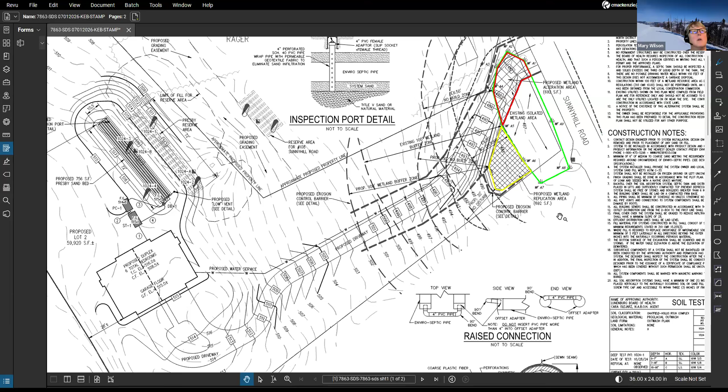We didn't do an intense topography of the area, but we shot the rim of the catch basin, then we took a shot just beyond, going towards the property here. The shot we took off the catch basin is actually lower than the catch basin rim. So water's coming to try to go to the catch basin, it's not making it there, and it's more or less getting backed up into this area.

We could certainly increase that by coming up the hill a little bit further. It's a little tough to get the driveway squeezed in here and still have some reasonable room. Obviously the higher up the hill we go, the harder it's going to be to make a replication area that's actually going to stick. This is more or less at the same elevation as the area we're filling, a little higher up in the back corner over here.

The area in question, from the sidewalk, looked like it was an area of mature tree growth as well. Yeah, it's been untouched for a long time, probably since they did the last work on the road when they put the catch basin in.

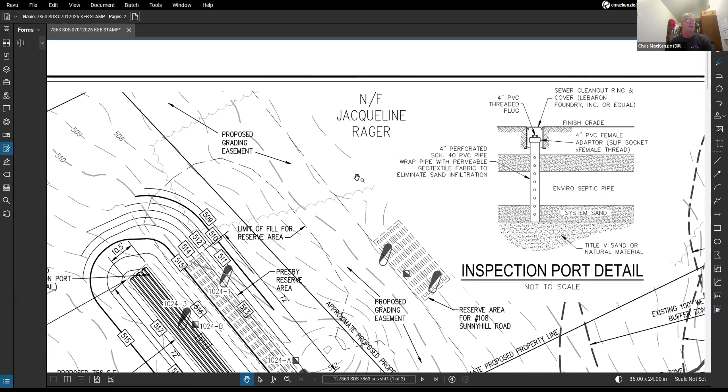The entire site is pretty much wooded, with the exception of a little bit of area back here—this is the existing tree line. So there's a bit of a field on that existing lot down below, but other than that it's completely wooded.

Okay, and do the plans moving kind of up gradient on this drawing actually have anything that accommodates for that raised elevation for the septic field and that sharp drop off from the septic field? And how do you ensure water doesn't just sheet off and into the next property?

Right, the Title V requires a minimum grading in this location, and we meet that grading. It's a 3-to-1 slope, which is considered stable by them with some loam and seed on it. Okay, and that answers the Title V obligations.

How do you ensure that the water from here doesn't just pour into the next property? Well again, it meets Title V requirements for the grading for a system, so that standard is designed to not allow water to flow onto the neighboring property.

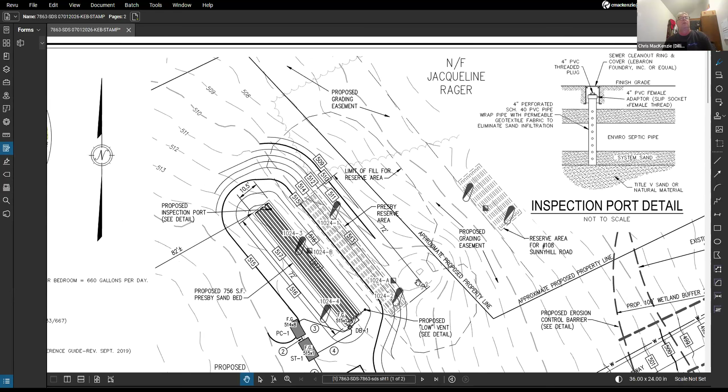The septic system area is not impervious, it'll have loam and seed. It'll be brought back to the same kind of condition with a vegetated surface that will absorb rainwater just like any other lawn area.

Okay, it just looks like there's some steep elevations back in there. They're a 3-to-1 slope, that's standard Title V system design, we design it that way for every system. Well, what I'm trying to say is that on top of the natural topography of the land, it looks like it's a little bit steeper up in that area.

It will be, yes, because it's a fill system. The groundwater table is a little high here, so we had to build up the leach area to meet the Title V requirements for groundwater separation, and that results in the system being higher. So at a 3-to-1 slope, it takes us a little while to get back down to existing grade.

You can see a proposed grading easement over here, and there's an easement line that's going to run right along here. That's there for the reserve area fill, which comes down the hill even further in order to meet the fill requirements for the reserve area, which is not being built at this time.

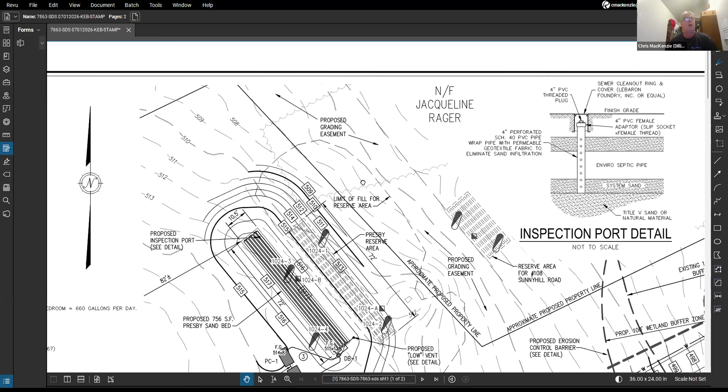It's there in case it does ever have to later on. But we also had to provide a proposed grading easement that goes beyond the limit of the reserve area fill, because this is a Presby system, which has a smaller footprint than a conventional system. When we design a Presby system, we're required to show that a conventional system could be built on the property. Therefore, we need the easement.

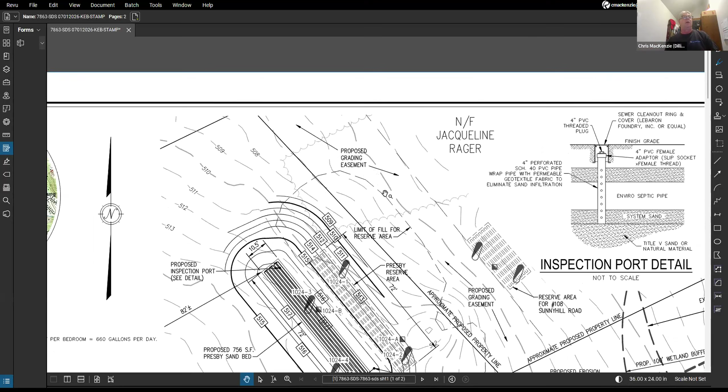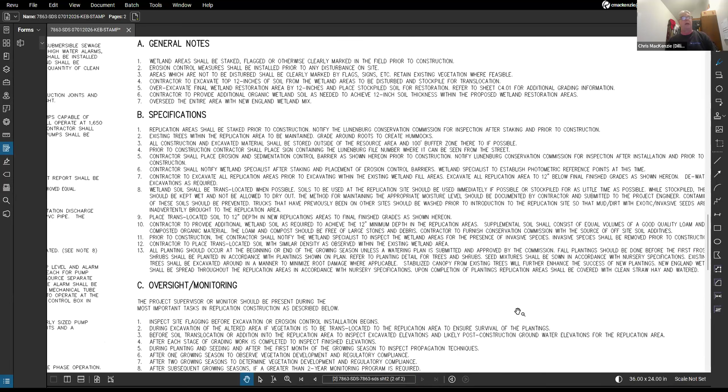I have a page 2 if you'd like to see it. It shows the size and scope of a conventional system that would, if installed here, be much larger and much more intrusive on the entire site. I can just hop right over to that sheet right here. Oh, of course, it's all turned off. Sorry, my mistake. My apologies.

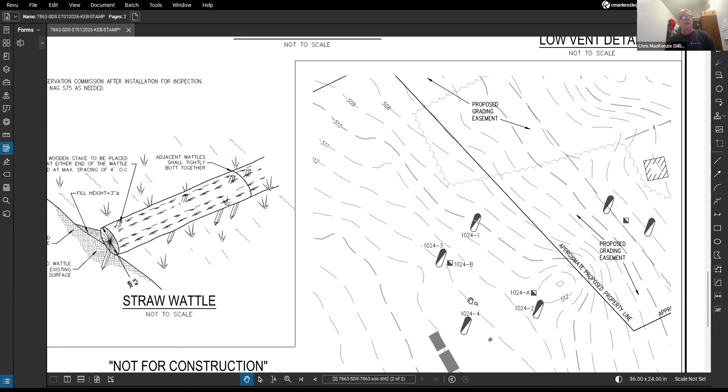It would show here if there was a conventional layout. It was set to be here. It must have been turned off when we did this particular print of the plan, but I assure you it's quite a bit larger than the Presby system and far more intrusive. So we've done everything we can in a sense. But still, if a conventional system had to be put in there, presumably it could still be accommodated within the parcel. Yes, okay, we're required to do that.

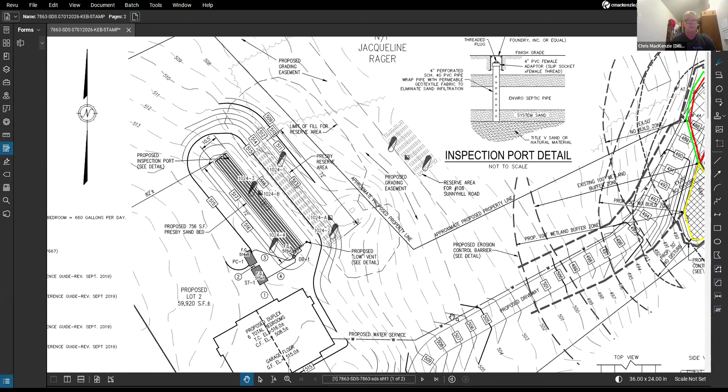I know I have another copy of that plan that has that on it. Yeah, I think we would need to see that just for full accountability on what could go on here. Sure.

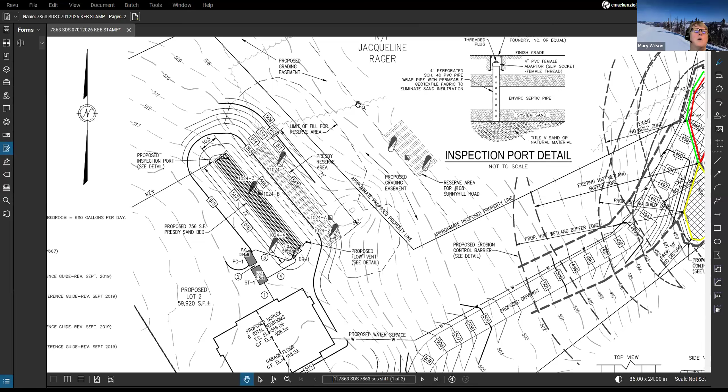All right, and then getting back to your driveway, how are you ensuring that driveway runoff doesn't get into the existing wetland system or the replication area?

Well, obviously, erosion control barriers will be put in place during construction. And then all of the side slopes will be stabilized before the erosion control barriers are removed.

Yeah, I think I would be looking for some type of, I don't know, French drain or something that would keep runoff from going into those areas. Well, that's my thought too, right? But this area is basically created from runoff coming down and not making it to the catch basin that's located there. So really, this is the only area for the water to go. We can't really make it go some other place.

How about a swale or something like that? A swale to where? Encourage it to go to the opposite side of the driveway. Okay, and that's just going to end up down in the road. So if I put it over onto here and swale everything over into this area and it comes down, where's it going to go here?

So I suppose we could swale this all the way down to here and do a culvert underneath. Put a swale there and put a rain garden or something upland there to minimize the full length of the driveway discharging onto the road or into the wetland. Up in this little corner right here.

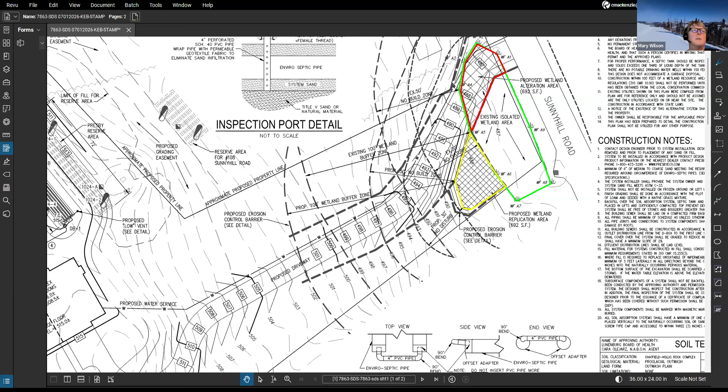Yes, Teddy Doucette. Thank you, Madam Chair. I agree with your sentiment here. I think a rain garden to help minimize the runoff and some native plantings would be great, especially since we're proposing to move and replicate the wetland area. I would like to see additional water catchment there. I like your idea, Mary.

Okay, thank you, Teddy. Rich Birch. Thank you, Madam Chair. Chris, I had a couple quick questions. Number one, the limit of work for the driveway prior to the rain garden idea is the erosion control barriers. That's the limit of work. That's correct, Richard. All right, so no trees outside of that barrier currently are scheduled to come out. Right, correct. Okay.

Second thing, I'm not a fan of a 1-to-1 replication area, and that may help with some of the stormwater problems, or Mary's idea of putting a small rain garden in on the other side to try to help mitigate. I mean, we're going to increase the velocity of the water coming down this hill, but we're leaving that isolated wetland that is the natural catch basin now at the same size, so it will, I think, get inundated. What is the elevation of the catch basin?

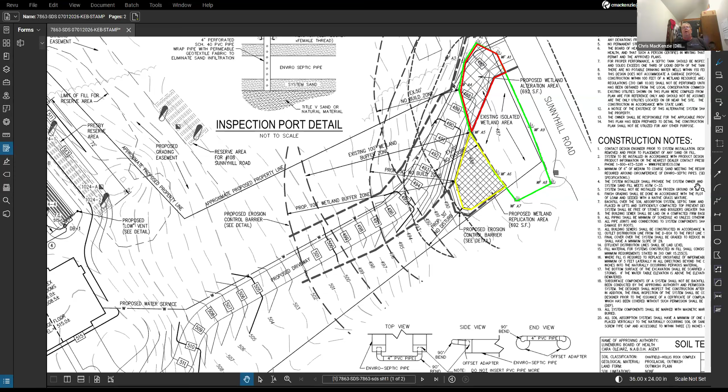And there's a shot approximately right about where the cursor is, and that is elevation 485.4. So it's a 10th lower, but it is lower. And we all know water doesn't go uphill.

Now, we didn't do an intense survey of this area, so I don't know what else is going on there, but that one shot indicates to me that this spot is lower than the catch basin. So if water gets here, it's going to stay here. It's not going to get to the catch basin. I don't know what that means going up this way, or if there's basically just some kind of berm or something in here that's just enough to prevent water from getting through and holding it back.

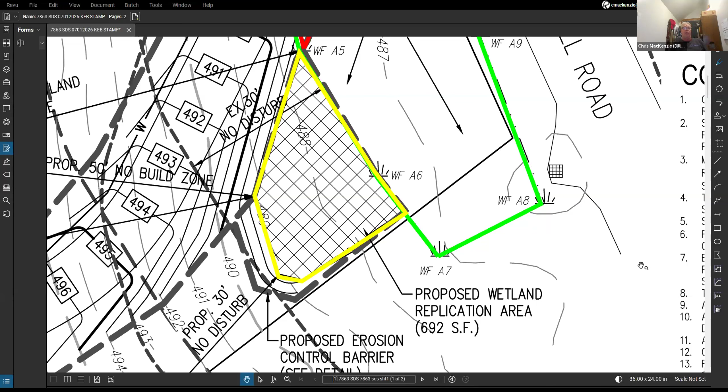It's hard to really tell without an intense investigation into that.

And I assume the replication area is going to be 487? 487 for an elevation, yeah. It's gonna, this 488 contour that I show right here, proposed contour, comes and wraps around the outside of that. I don't designate a specific elevation in here.

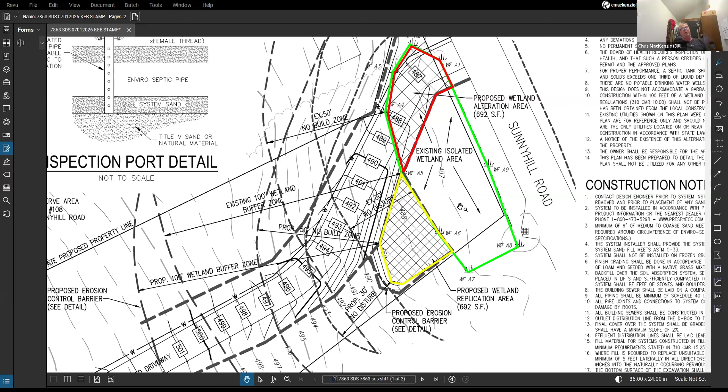I don't know that we could cut this all the way down to 487 without intruding into this wetland to make it connect. We need to keep the elevation equivalent at the connection where these meet.

If we go lower, we're going to more or less create a berm in between there. So if I bring this down to 487 over here, there's going to be a berm here, and then it's going to drop back down again. So that'll cause a problem.

So this area needs to stay above 488 then. It just didn't have any final grade in there, so I was just investigating what we're going to be at the end of construction.

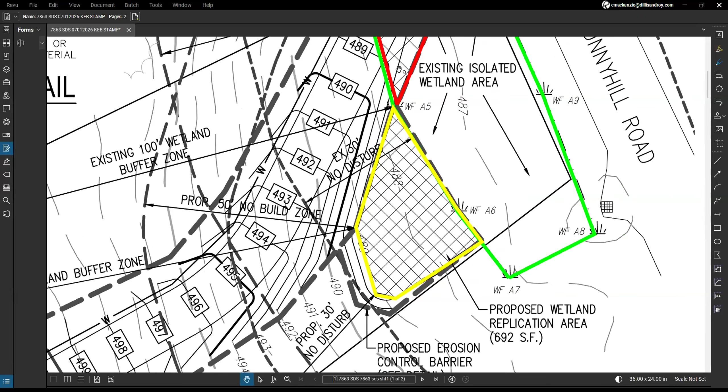Sure. And do you have a construction schedule showing that the driveway will be put in, all of the grading will be stabilized inside the 100-foot buffer, and the replication area will be constructed at the same time?

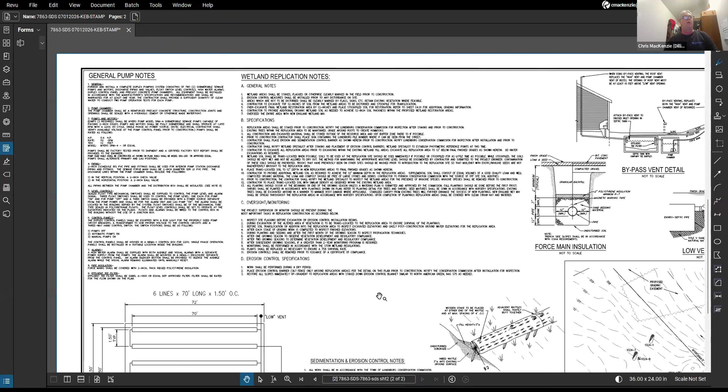We have some notes in here. I don't recall specifically what the orders are on it, but we do have some in here. Can you make that larger, please? Certainly. Yeah, thank you.

So it does talk, this is mostly for the replication area and how that is being constructed. Okay, yeah, I read through it, but I didn't see a schedule as far as I would like to see all of the stabilization and the replication area all done during the construction phase of the driveway.

So in the beginning, so that we get all of that stabilized. So if something happens and this project sits over a season or two, we don't all of a sudden have open ground running and erosion problems into the isolated wetland that is existing, plus the replication area that we're trying to establish.

Right. Well, it's typically the practice that you need to do the replication and the filling at the same time. That's standard practice. So are you saying you want to make sure the driveway is constructed at that same time?

Unless you want to do it before the driveway. Well, right, I'm just trying to understand what you're asking. I don't know if I quite understand.

I would like to, I mean, we're not talking months of construction there. I personally would like to see the driveway put in at the same time as the replication area so that we're grading in the same area and then everything is stabilized and the replication area is established, all at one fell swoop.

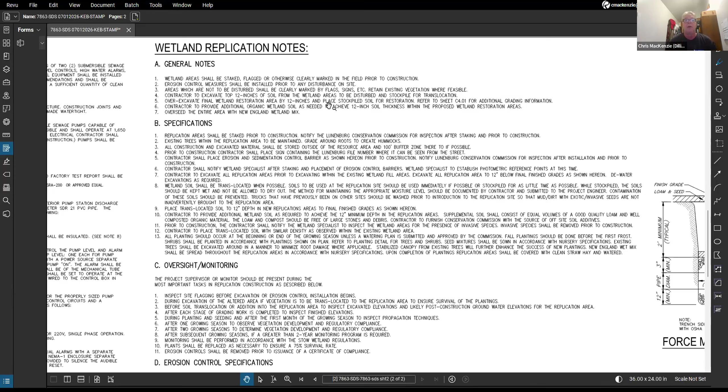I don't think they want to go through the existing house lot to do that, because that would just be some additional construction that would be needed to get back there. So the driveway will have to be built before they can build the house.

So I think what I heard, Rich, is that Chris agrees putting in a construction schedule to detail out the replication area first, and stabilization done by the time the driveway is done, is acceptable. Is that what I think I heard, Chris? Yes, all during the construction phase of the driveway. And that would be prior to, obviously, any construction for the building starting.

Other questions or comments from members of the commission? One thing I did want to point out with any replication area is that we expect that to be monitored over the course of two years by a certified wetland replication scientist. I think it's a wetland scientist. We have some canned language that I'm certain Herlin can find for us if need be. Just to put that out there as an expectation in case anybody has any concerns or wanted to ask questions about that.

Are there any questions or comments from members of the public? If so, raise your hand and state your name and address, and I'll call upon you.

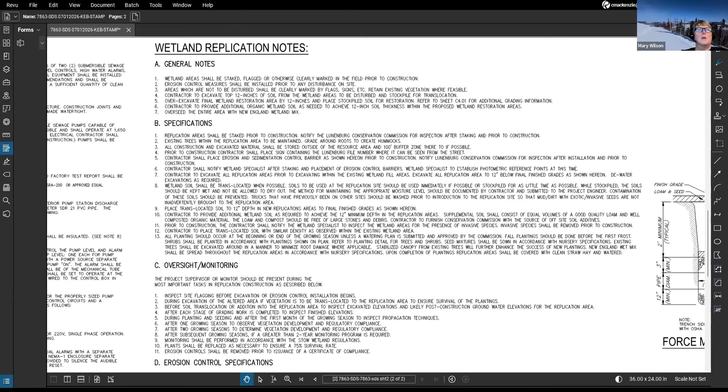Sure, let me try. Thank you. Colleen, I see your hand raised. If you could state your name and your address.

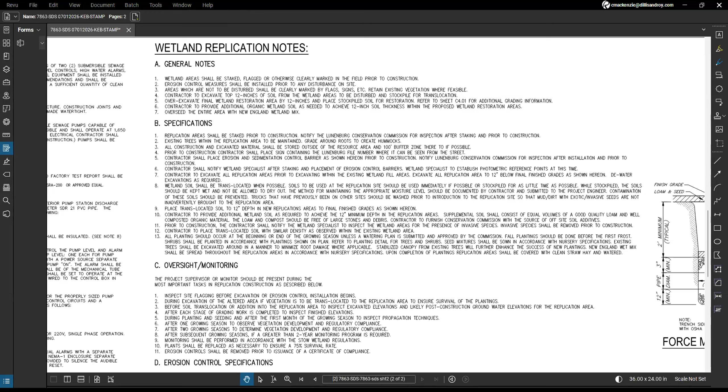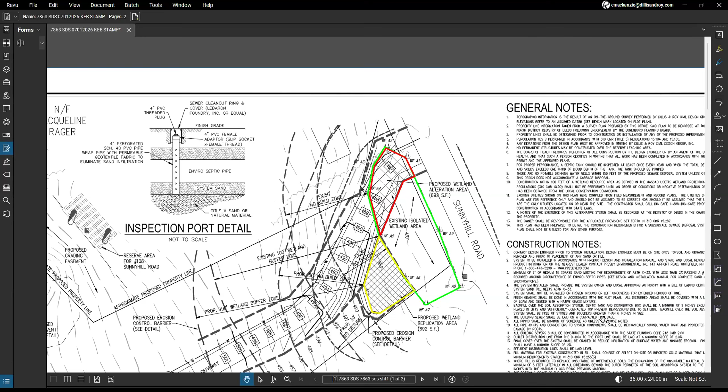Hi, my name is Colleen Kostich. I am at 119 Sunnyhill Road in Lunenburg. I believe the driveway is being proposed right across the street from my house. The biggest concern I have is flooding. We have huge flooding problems in this area. This past Monday, I had rivers going down both sides of my house, pouring into my basement. I had a lake in front of my house. I am probably the lowest point of Sunnyhill Road, and I was out moving sandbags around my property in the pouring rain because it's so bad. So I don't really have a problem with anything that anybody wants to do with their property. I just have a problem if it's going to negatively affect the huge problem that we already have on Sunnyhill Road.

Thank you, Colleen. Colleen, were you the abutter that shared photos, or was that one of your neighbors?

Oh, Colleen, you went on mute. Sorry about that. I am not the one that submitted those pictures, but I did share some of those pictures with my neighbor. So some of the pictures that they had forwarded to the Conservation Commission were my pictures. Okay, thank you.

Let me just download those photos and then I think I can share them. Herlin, I think you said that you weren't able to share them. I am not. It says because I am a host, it won't let me share, and I think it's the settings on this communal Zoom account. Yeah, let's see if I download them. It's weird because I'm a co-host, presumably I should have the same issues as you, but at least for right now it's saying that I can share them. Oh, it only downloaded one image. Let me go to the next image.

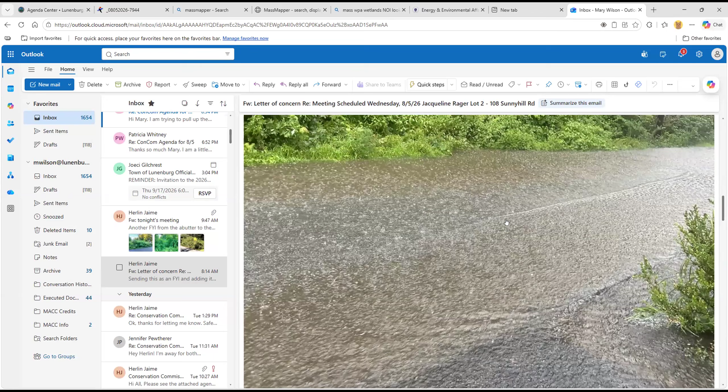And when was this taken? Was this from this week's storm? Yes, this was this week's storm, on Monday. Okay.

And that is to the left of my driveway at 119, in between my driveway and I believe the Todd and Tabitha Jennison house, 129. There is a basin right there on the other side of the basketball hoop, and there's just water overflowing that and a river going down into the back where a stream normally is behind our houses there. So that entire area, from my house over to Todd and Tabitha's driveway, is a river.

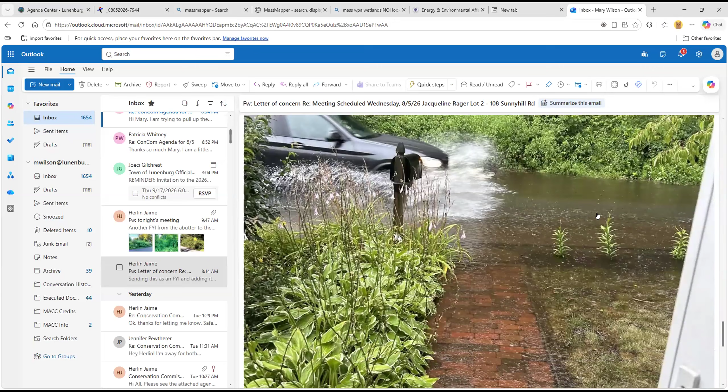And then this is looking straight out off your property. I just happened to open the door to take a picture of the lake in the front of my yard, and a car was coming through at the same time, so I caught that picture. That was after it stopped raining — it just holds water.

Thank you for giving us some context on those photos.

Rich, one of the things I was wondering — I've seen, though we don't ask very often, sometimes for driveways coming down steep slopes, a kind of drainage area at the end of the driveway so it's not just sheeting onto the road. Would that be something to consider here, do you think?

Well, I'm not sure where they would put it. Because in the picture with the brick pavers directly across the street, just off the apron, I can see the other catch basin that I believe is the one on the plan at the end of the wetland area. So, unfortunately, not knowing any more information about the rain flow, the water, how often it backs up, and where the water goes, I don't see how we can dictate any more than what we have.

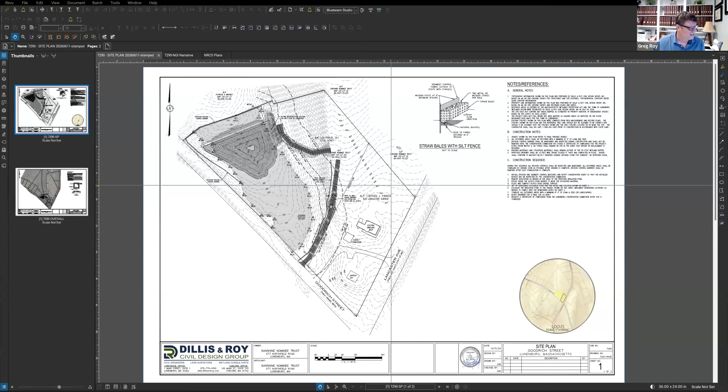Screen are you seeing? Are you seeing the plan? Yes. Okay, my computer just did strange things on me, so bear with me here.

Again, this is Greg Roy with Dillis & Roy. I'm representing the applicant this evening. I do not believe Mr. Violet is here, but I think John Mara is a representative of the applicant, so he's on the call as well. I wanted to be brief this evening, but give enough due diligence to solicit the commission's comments and any comments from the abutters.

We do not have a DEP number on this project, just to tell you where we're headed. I checked my email while waiting for the last hearing, and we did not get a DEP number on this one that I know of. So we will not be able to close this evening, but I wanted to introduce things with the hopes that we can get any comments in front of us so we can be ready to put the commission in a position in the next couple weeks.

So the commission may recall this project. It's essentially running the corner of Goodrich Street, which you can see here on the lower side of the plan, in Lancaster Ave.

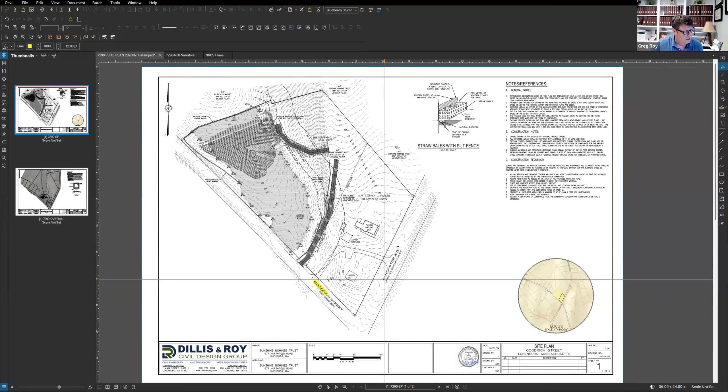There's an old farmhouse that's been recently renovated and sold right on the corner, and we came before the commission. There's actually a current order of conditions granted by your commission about a year ago, plus or minus a few months, for construction of this access driveway that comes up right in this location. That driveway has actually now been constructed. We haven't quite gotten to the point to request a certificate of compliance from your commission, but that work has been completed and installed. It was done earlier this summer by the applicant.

We've been working with Steve. Steve, of course, is a farmer. The property is directly adjacent to one of his fields, which is on the uphill side of this property. In fact, the driveway that was permitted was done so to provide access to those farming activities. And Steve is interested in constructing an irrigation pond to support the agricultural use of those fields, which has been done on a couple of properties he owns in the past, historically.

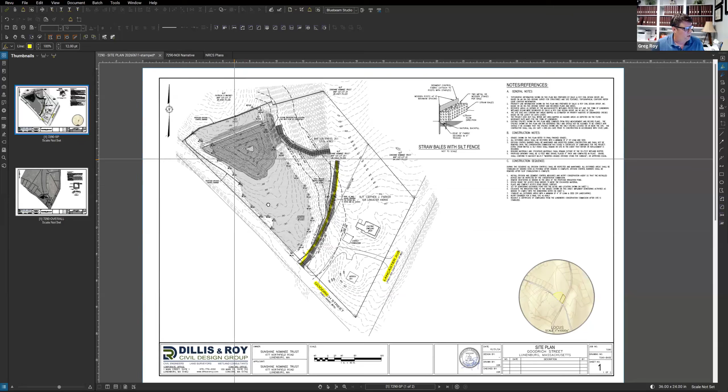So, turning to the plan, if you were to take Goodrich Street and come down past that existing house on the corner and past the new driveway, you'd get down to an area where we're proposing to work. Let me see if I can zoom this in as much as possible. The hatched area you see, sort of the gray shading here on the plan, is the limits of the bordering vegetated wetland as they've been delineated by our office.

So we have a line here that runs roughly parallel to the roadway. This wetland line was previously delineated when we did the road project a year or so ago. The dark circular-ish lines you see here down in this portion of the site would be the limits of the proposed pond on the property.

Earlier iterations of this had the pond actually slightly larger, coming closer to the property line here, which is the abutting property of Mrs. Whitney, who is also on the call. We pulled that back to give some buffer, but also because we had to honor the 20,000 square foot alteration, which seemed to us the most appropriate way to do it.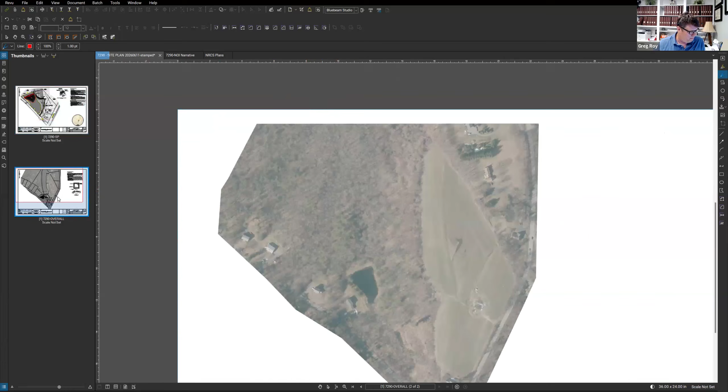This plan here is an overview of the entire area. The pond area we're talking about would be excavated right in this location. This is the limit of the property, and the agricultural property line comes all the way back up here.

This is all Mr. Violet's land, including this area. We're proposing to run the dewatering line straight uphill along the edge of the field over to this point, where there's a good existing location. Using the existing topography, we can fairly easily create a sedimentation area there without bothering anybody, with plenty of space to provide sedimentation for the dewatering flow generated during construction.

That area is completely outside of the buffer zones and resource areas, but I know your commission was going to be interested in it, so we wanted to make sure we showed a plan for that.

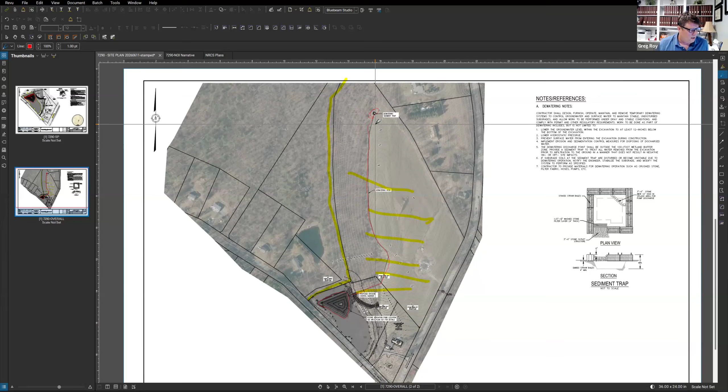The only other thing I wanted to point out is that we are proposing to build an access road. This road will be used during construction to excavate and remove the excavated soil material, but it will also be permanently left in place to provide access to the pond for pumping and producing the water required for irrigating the fields.

I think that's where I wanted to leave it for now. I'm sure you'll have some questions. As I said, we are waiting for a DEP file number for this one, so we won't be able to close it, but we are hopeful to keep the ball advancing here. Certainly happy to take any questions or comments that the commission may have, or from the abutters.

So this is a new one on me. I've not had one like this come before me as commissioner since I've been here. Does this parcel need to be in farm use for this exempted activity to happen?

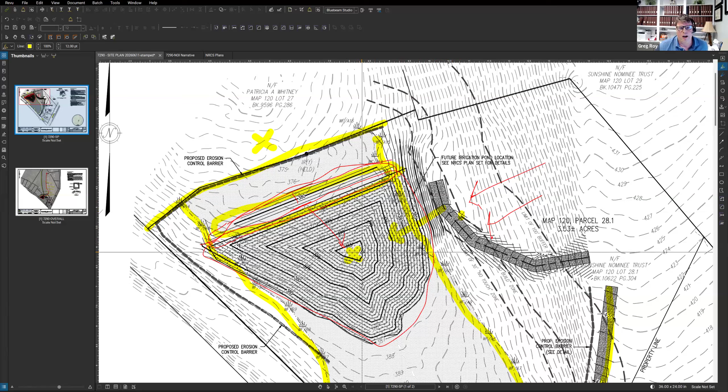You can see from the contours, the flow of water is this way. So when we build this—I'm having a hard time here with my colors—but this whole area is berm, and this area, of course, is low. So all of this construction will flow this way into the pond, and it will not have any opportunity to pass over this berm and then down. So I think that the erosion control that we have in this case adequately protects us.

Okay, and I see your point with regard to the direct down, but the rest of the BVW that's not actually going to be part of the pond—I mean, I think we still have an obligation to protect that as well, that's all. That's all upgradient. This is all higher in elevation. But not higher in elevation from the driveway, I mean, it looks like the area of construction for the driveway also. I recant. You're correct, Mary. I think you're right, we owe you some erosion control here. Okay, you're absolutely right about that.

It's an interesting project, but certainly in these days where we have class 1, class 2, and even sometimes class 3 droughts very routinely, you can understand why one of our farmers is going to need some irrigation to keep his crops going. And certainly all of us in the community and the surrounding communities fed as well, right? So it's not just benefiting Mr. Violet, but all of his clientele as well. So I can certainly understand that.

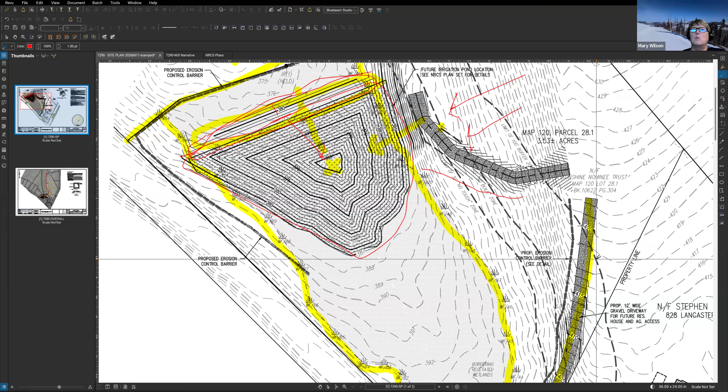I recalled when we permitted that driveway toward the bottom of your drawing as it's oriented now, that there was some standing water over there, but it's been pretty dry since then. We don't think there's going to be an issue with the volume of water.

You can see it on this plan here, but there's an existing pond here that I think was similar. I'm not exactly sure the history of that, but I would imagine that was probably dug in a similar manner way back when. But we may get a history lesson on that. So we think that there's plenty of hydrology here.

And again, these ponds intercept the groundwater table, but they don't alter it, right? The important thing is that when we're done, the hydrology of the wetland downgradient of the pond will remain the same. We're not looking to do anything that will negatively impact things as we go downstream.

Okay, are there other questions, comments by members of the commission? I am not seeing. Okay, Rich. Yeah, just quick, Greg, and you kind of touched on it a little bit.

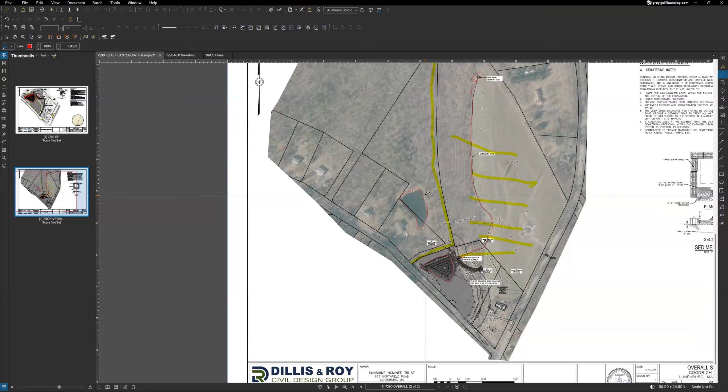There are other ponds in close proximity to this proposed pond, and you've gone through the hydrology, made sure that this won't affect things. There's one pond on Miss Whitney's property, and another one right across the street on Stillman's. Opening this fissure here up isn't going to affect the levels or the ability of those two ponds to continue?

So no, that's good. This one actually is lower in elevation than even the bottom of the excavation we're proposing. This pond here is roughly, you can see right here, it's roughly 365 at the rim, and that's the elevation of the deepest portion of the pond we're proposing. So we're actually above it hydraulically, if you will.

You could work that hydraulic gradient backwards, actually. All of the excavation we're doing is vertically above that. It's kind of hard to explain.

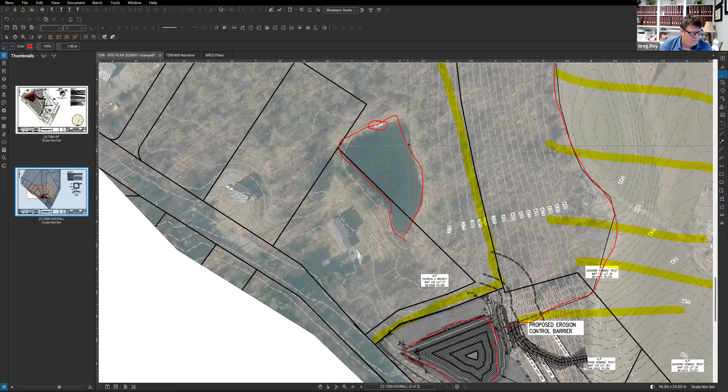I haven't really looked at the Stillman's pond, but I suspect, I think that Lancaster Ave, I think that we have a saddle condition there, Rich. So I think that flows off in the other direction. I'd have to get back to you on that, but I think more or less Lancaster Ave formulates a watershed, a hydraulic divide, and that pond is being charged. I think that would be fairly isolated from this one in terms of a groundwater table issue, but I'd have to get back to you a little bit on that.

Okay, yeah, it does on the USGS. They do show it flowing the other way, south. I think they show an outflow, down the other direction of Goodrich, I think, correct? Yep, exactly. And then it goes, I don't know where it goes, but it probably goes around the bottom of Stillman's and flows down to, I would imagine, one would think, maybe towards, well, eventually towards Lake Shirley, right? Yeah, I don't know if it goes, I would think it goes down the bottom of the Stillman's, if you were to kind of go where the barns are and go down over the hill. I think it flows that way, and then there's some more ponds down gradient to that, I think. So I think it flows that way.

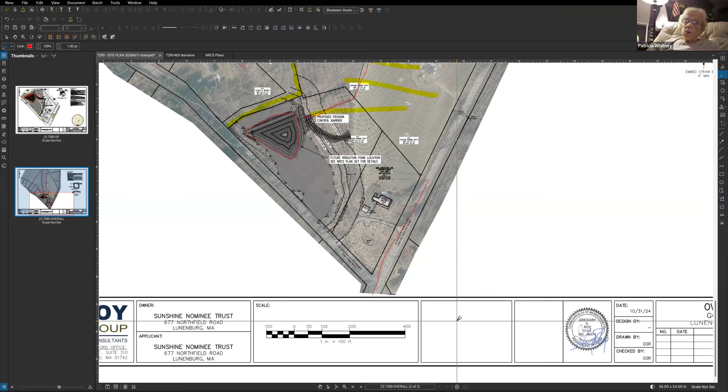Miss Patricia, if I could ask for the consultant, Greg, to address that concern of yours. I'm going to ask Greg Roy, who's a professional engineer, to address that. I think he's done some analysis around your concern.

Okay, thank you. No, it's an excellent question and concern. Whenever we do things like this, really whenever we do any kind of stormwater or anything that relates to water, we're always concerned with upgradient issues, which isn't you, but also downgradient issues. So whenever we're proposing something that modifies or has the potential to modify stormwater flow, surface water flow, groundwater flow, anything like that, it's our job to propose a solution that at the property boundaries doesn't change things.

So this is one of those situations where we're proposing a pond here, which is a groundwater fed pond. It is upgradient to your pond, but we believe that there are, based on what we know and understand of the groundwater characteristics in the area, sufficient tributary area, aquifer if you will, that's feeding both your pond but also the upgradient areas to this pond to provide both with sufficient volume, and that the construction of the pond on Mr. Violette's property will not adversely impact yours.

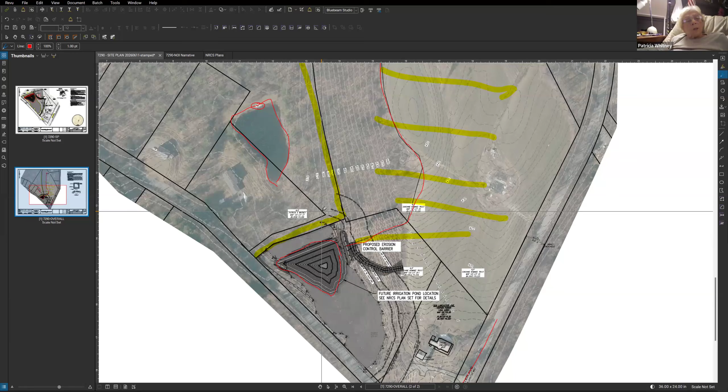No, I just wanted to say that the yellow line you've drawn here, up and over to Steve's field -- I can't point, but that is my property, and I own up to almost the top of the hill in the back where Steve's farmland is. So that's my main concern: if it draws out my pond, what do I do about it?

That's the other question -- understood. What would be the recourse if the pond is adversely affected? Good question. Herlin, do you know? We'd take steps not to have it be a civil dispute between abutters. I don't know that the ConCom would have jurisdiction in that case. I don't think so.

By the letter of the law, the state statute -- and I'm talking a little out of turn here -- I think actually the Board of Health is the board designated to deal with these types of issues, stormwater flow and this kind of thing. In practice it's not really done that way, but my only response is that we take steps and precautions during the planning and design of these things so that doesn't happen. But I can understand your concern.

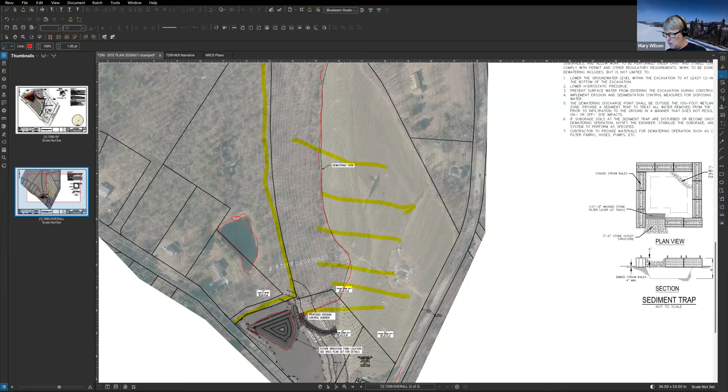Moving along, pursuant to Mass General Law Chapter 131, Section 40, as amended in the Town of Lunenburg Wetlands Protection and Municipal Bylaws, a notice of intent by Unitil for the construction of a new substation and replacement of utility poles at 934 Mass Ave. Do we have the applicant and/or their representative here with us tonight?

Herlin, you haven't heard from them? I haven't, but let me just verify that I didn't receive anything. Typically they do email me on very short notice. Just bear with me one moment.

Nothing from them. The last email we have is from the 15th, where they asked to be continued to the next available meeting.

Okay, I think we were waiting on some clarifications from them as well, as I recall. They were trying to put together answers to DEP comments. Yeah.

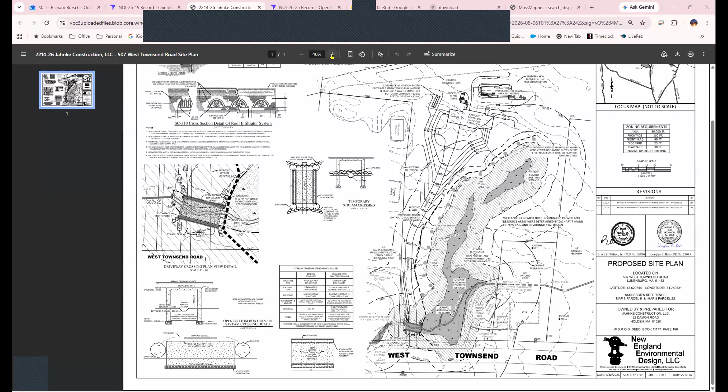So at the last meeting, we spoke about it in general, and I addressed the previous meeting's concerns, and we were left with wanting a planting list for you guys for what's going along the 30-foot no-touch zone. So on this new plan, up a little higher, I've got a table with a plant list and specs that lists out the size and quantity. I didn't specify what order they may go in along the 30-foot buffer.

I found that to be a little irrelevant. I figured the homeowner could maybe do that at their discretion. I've got a selection of shrubs I chose over trees so that they'd remain short in the long term, easier maintenance. And I tried to select ones with wildlife value and ease of maintenance, value to the homeowner, aesthetics, berries or something, you know.

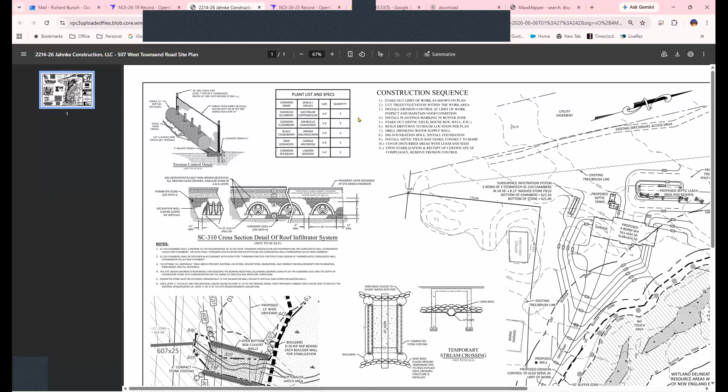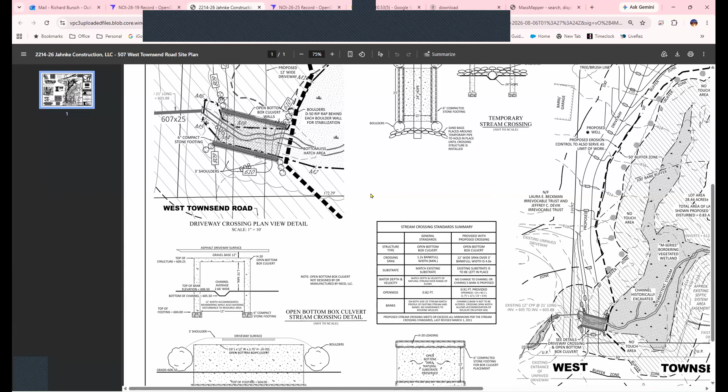So there's that. And then the more important thing we discussed was meeting stream crossing standards. I've updated the crossing. We no longer have culverts proposed, and we've got an open bottom box culvert that we actually managed to span across so that it won't be dug into - we won't be disturbing any wetlands directly to set the footing that the box culvert will go on. If you see that detail there, we've got it just outside the actual extents of the wetland.

And it meets all criteria for the general standards of the stream crossing. I've got a little table there to the bottom right that lays out the general standards on the left, which are the minimum standards, and then how we have met or exceeded them on the right.

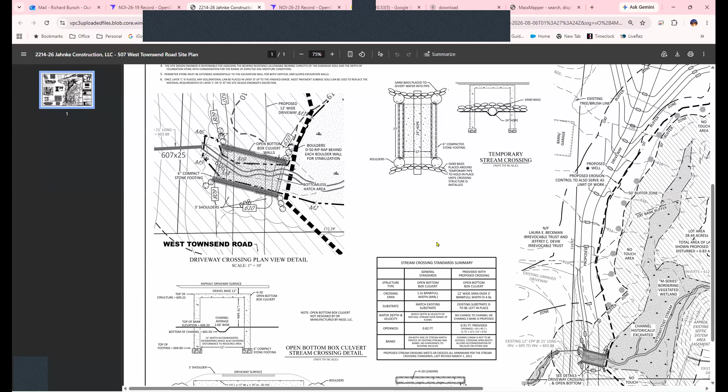So the openness is really, I think, the most important factor, and we have that. It's a little hard to read, but the minimum is, I believe, 0.82 feet, and we ended up with 0.91, so we are exceeding the openness minimum standard, and we are meeting or exceeding everything else.

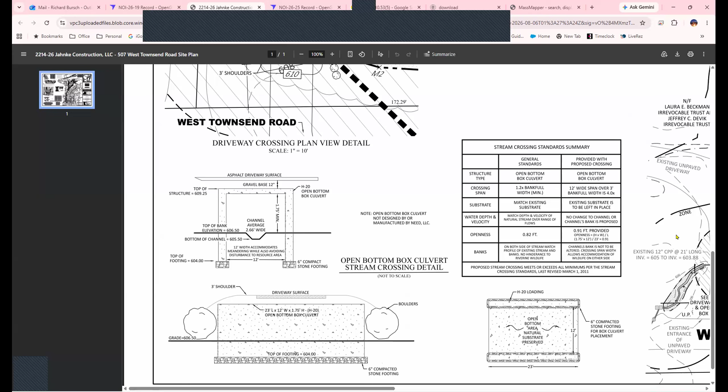The substrate of the stream below won't be disturbed the way we are proposing work now. The span over the river isn't disturbing the wetland itself, so there will be no wetland filling, should be no need for wetland replication, and the span will allow the bank along the stream, both sides, to remain intact and available for whatever minor wildlife, turtles, amphibians, salamanders, whatever need to traverse that stretch right there. They'll have plenty of natural access.

Excellent. So Zach, yes, and Rich is sharing this for us. Right in the center of the screen, my screen, I see a 24-inch HDPE pipe. Where does that go? So that is the temporary crossing that will be put in place to allow the stream to continue normal flow while all this construction's happening.

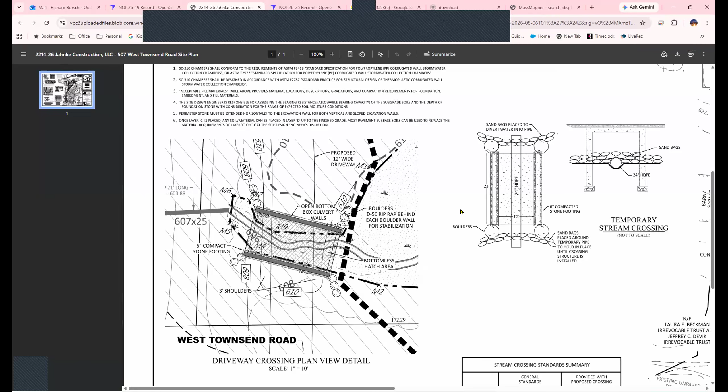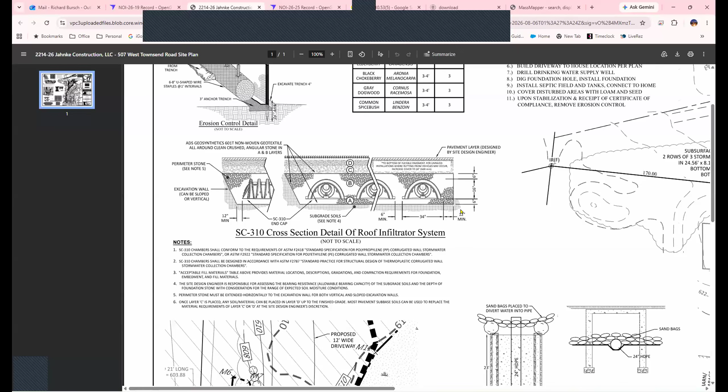Okay. And do we have, Rich, you were asking earlier about a construction schedule. Do you have a construction schedule here? Has that been brought up before? Like a construction sequence, yeah, I had a general one. I believe it was up the page a little bit, right there to the right of the plant spec, construction sequence. I believe I had it on the last iteration.

Okay. Do we have questions or comments from members of the commission? And I don't see any hands being raised. Do we have questions or comments from members of the public?

I don't recall. Were there DEP comments on this? There were - I don't have them right in front of me, but as I recall, I think they were only concerned with the stream crossing. I believe they were the ones that brought up that our culvert proposal wasn't sufficient, and so we delved deeper and now we're meeting the stream standards or exceeding parts of them. That's correct. Yeah, I did find my tab where we have the DEP comments.

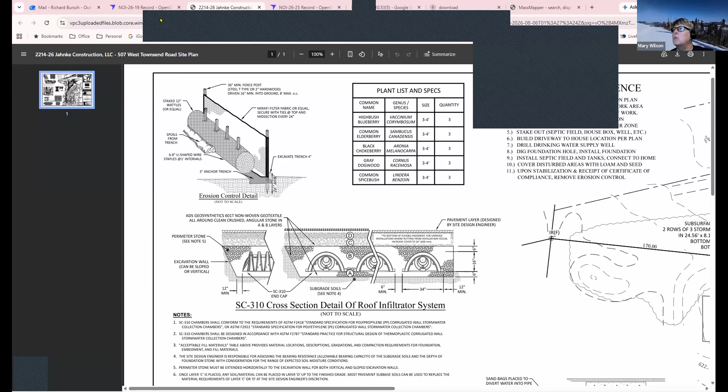Madam Chair, sorry, I just can't raise my hand where I was sharing. As far as the construction schedule, there were a couple comments there about the plantings and the plantings being directed by the homeowner. And I just want to make sure that all of the stabilization and the final plantings are all in place at the time that the span is installed.

And I just don't want to see the span installed, we put the driveway in, then we do everything, and then we come back to do the final grading and stabilization and planting at the end of the project. It all needs to be done when you put the span in place, concurrently.

And yeah, I did not mean to imply I don't believe the homeowners will be installing the plantings themselves unless that's allowed, but I just meant that, I want a blueberry bush there and I want the dogwood there, that type of thing, because I don't think the order of the species much matters. No, because they're all pretty much the same sized plantings, and they're all deciduous plantings. None of them are tree form, so get them all in place.

But yeah, have all of the stabilization and the final plantings all done at the same time as the span is installed. And I can revise the construction sequence there to reflect that, or unless you were intending to write that into the order, I'm not sure how you - we certainly can. I think it'd be most expedient to write that into the order, then maybe proceed with issuance of the, or at least taking the vote on the proposal.

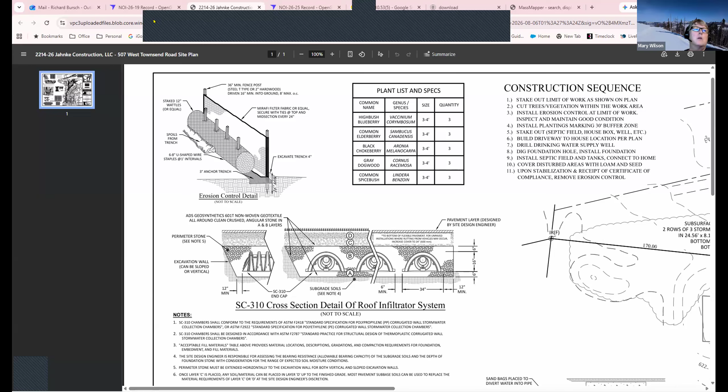So, if I don't see other questions or comments, I think I'm looking for a motion to include those 2 specific conditions that Rich detailed. So moved. Second, Teddy. Thank you, Mike.

Okay, roll call vote. Rich Bursch, aye. Mike LaRouche, aye. Teddy Doucette, aye. Andrea Burnett, aye. And I for myself. Thank you, Zach.

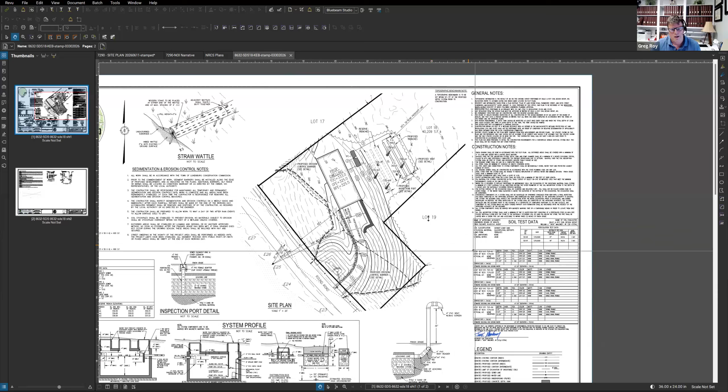So this one is the last remaining lot that we, as part of a larger project, have permitted the lots on either side of with your commission. You've already issued orders of conditions for, I think, lots 16, 17, 19, 20, 21, 22, 23. For whatever reason, this one was last to get to you. So we had the benefit of working in all of the comments. I think it's one of the reasons why we didn't have any DEP comments on this one. We worked in all of the previous comments, all of the previous plan tweaks, and additional information from both your commission and the DEP when we prepared this plan.

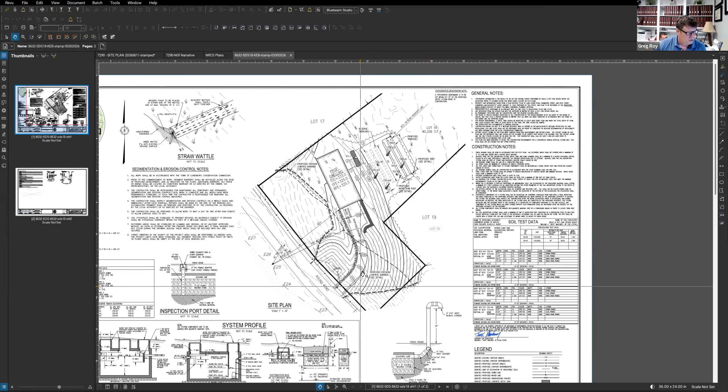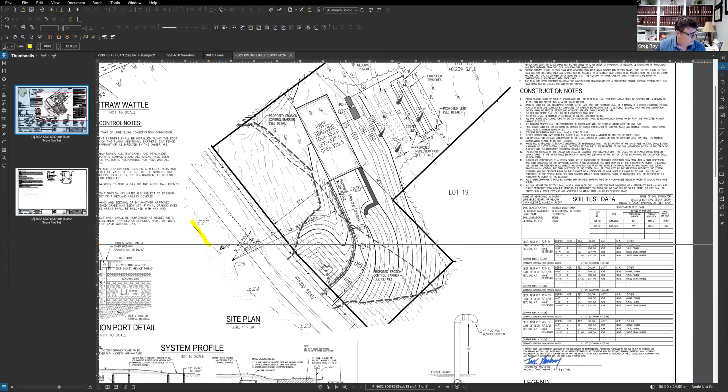But generally speaking, same treatment as before. We have a stone trench that comes down the edge of the drive, and it all flows into a rain garden area here before it exits the site. There's no work proposed within the 30-foot zone. Just for your reference, the wetland area is across the street down here. The 30-foot zone is right in this area, essentially down the middle of the pavement. It starts to come out over there. 50 feet is here, like this. So we have a little bit of work in the 50 for the actual driveway, but most of the grading and the rain garden is all outside of that. Erosion control barriers are proposed anywhere work is proposed in the buffer zone. And I think that's it.

Very good, thank you, Greg. I don't have any questions. Do other members of the commission have any questions or comments? I'm not seeing any hands raised. Oh, Teddy Doucette, you have your hand raised.

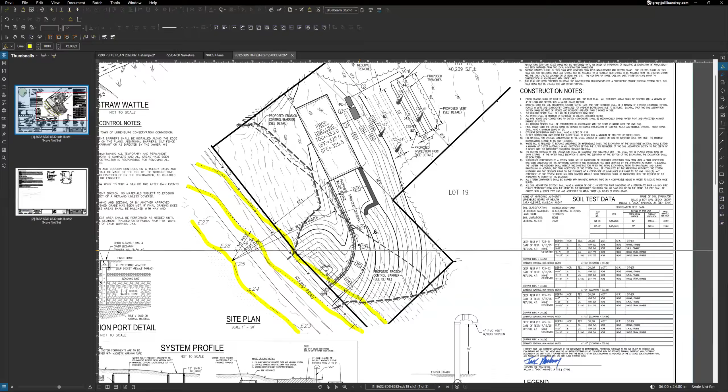Yeah, thank you. I was just wondering where this is relative to the rest of the lots. Like if I were to zoom out, is this closer to the other homes next to the lake, or is it on the other side where it looks like there's some sort of a mill?

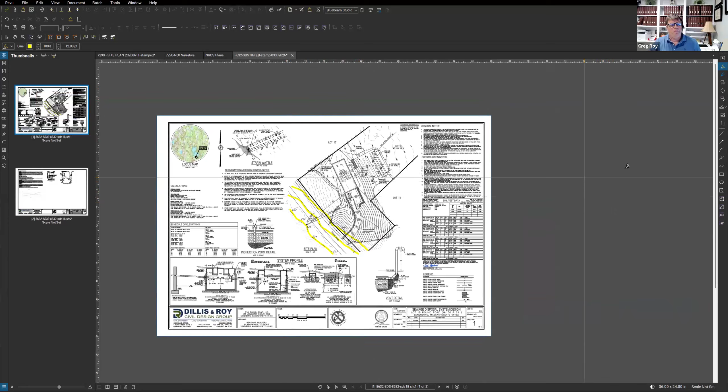Great point, Teddy. That's one of the things I have been asking Ryan to ensure we had uploaded, kind of an overall subdivision mapping of these lots. I'm going to stop sharing and open up a plan that'll help you. Hold on one second. Give me probably 60 seconds here.

Okay, I'm not sure that this is the actual latest and greatest plan, but I think it'll communicate what we needed to. Hold on one second, let me share again.

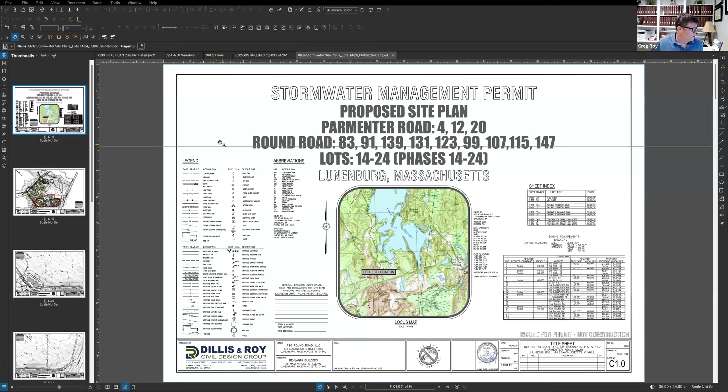So again, this project is part of a larger project. There's 25 lots, 23 of which are being proposed currently for construction. This plan right here is what is before the planning board. So in addition to needing orders of conditions on some lots from your commission, we also need a stormwater permit on all of the lots from the planning board. So this plan is before them, but it shows the overall site. And the lot in question here, Teddy, is this one right here.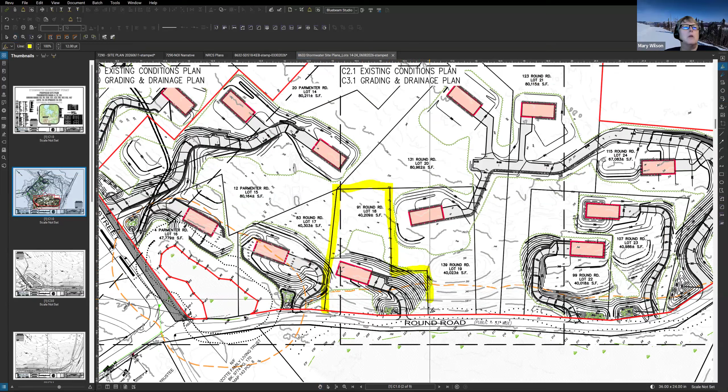Greg, has this been, I know technically it's not required, but has it been given to the commission? I've asked for it a couple of times. Has it been uploaded to OpenGov? I don't know. If it hasn't, we certainly can. I apologize if it hasn't and you've asked for it. I didn't know that if that's the case. It just helps us understand, particularly where these subdivisions don't show up on the tax parcels yet, where we're actually talking about it in context. I will say it is on OpenGov. You should be able to search the public documents on the planning board page, but we can certainly upload it.

To this actual application. Okay, application Herlin actually said that she has received that. So I just haven't caught up with where Herlin was. I was going to make some heads roll if we didn't give you something you asked for. So no, Herlin intervened on behalf of your staff. So again, you issued orders for this. These two didn't require it. This one, and you did an RDA 3 weeks ago for that one. Okay, so they're all done. It's just if for whatever reason this one didn't get filed with the lot, we probably should have filed it at the same time, but it just didn't happen. So very good, Teddy, that addresses your question, yeah?

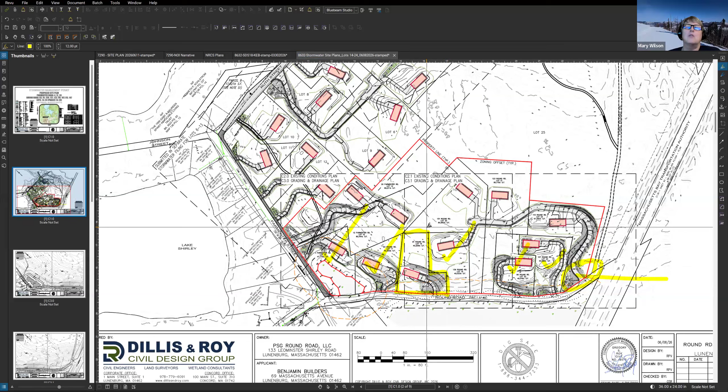Yeah, thank you. The reason I ask is because I got an email from somebody in town about this going ahead of in front of the planning board or something, and people were concerned about the runoff going towards people's properties, and a lot of the runoff is managed by these rain gardens, which they were unsure about how they were going to be maintained unless there was some sort of HOA that kept them in place. And I do have another question after that, but go ahead, Greg.

So the planning board, as I said, is reviewing. We have to do per the town of Lunenburg stormwater bylaw. We have to get a stormwater permit for every single lot here. We have done all those filings with the planning board, and they're pending final review essentially. But the very reason why we're at the planning board is to document that we are in compliance with Massachusetts stormwater management policy for stormwater, which includes compliance with all 10 standards of the stormwater policy. I'm not going to bore you with all of those standards, but they require us to document that we're mitigating runoff on site and not increasing off-site runoff. We have to meet recharge standards. We have to have an operation and maintenance plan on every single best management practice, BMP, that we're proposing.

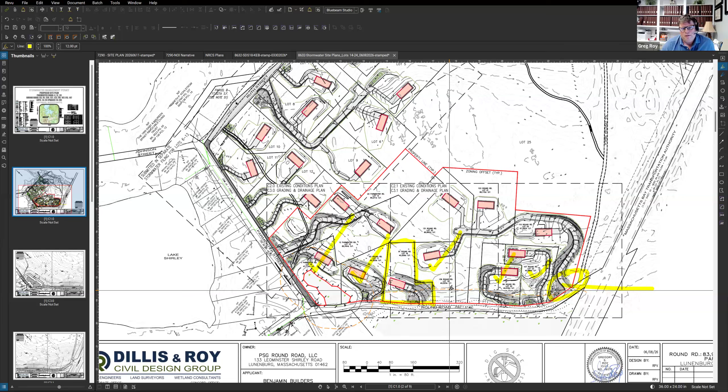Yeah, we do. In this case, this is a pretty unique piece of property because there's a lot of frontage, a lot of existing frontage on legally accessible roadways and viable roadways. A lot of times, Teddy, those type of open space developments are really desirable when you're looking at doing an actual subdivision where you're proposing a new road, and you can cluster those around a new road that's required to generate the frontage for those new lots. In this case, the frontage exists to do that. So you have a pretty rare situation where you have a 25 lot project that is being proposed by approval-not-required plan, which means you don't have to use the subdivision control process to create the frontage required. So it's a little bit unique. A lot of 25 lot residential housing projects, you would see open space type developments, but in this case, just because of the way the lot is and the existing roads and things, it just didn't work out that way. Okay, thank you, Greg.

Thank you, Teddy. Any other questions or comments by members of the commission? Berlin, any comments or recommendations that you wanted to make on this project? None.

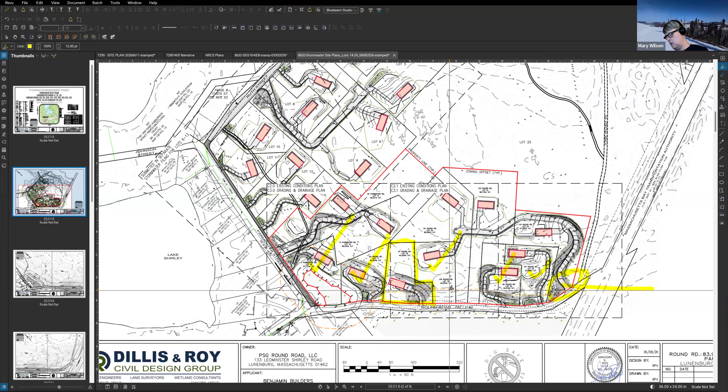So I think I'm looking for a motion to approve. So moved, thank you Mike. Second, thank you Rich. Roll call vote: Rich Birch, aye. Mike LaRouche, aye. Teddy Doucette, aye. Andrea Burnett, aye. Aye for myself. Thank you, Greg. Thank you, everybody.

Very good, moving along. Pursuant to Mass General Law Chapter 131, Section 40, as amended in the Town of Lunenburg Wetlands Protection and Municipal Bylaws, a notice of intent by Carlos Silveira for repair and upgrade of a failed septic system at 15 White Street.

And do we have Carlos and or his representative here with us tonight? Hi, I'm Luke Roddy. I'm the soil evaluator who did the perk test, and my company's going to be doing the septic install. The sanitarian that designed the system wasn't available tonight, so I'm sitting in. I believe Carlos is on the call as well.

Okay, very good. Luke, do you want to get us acquainted on this project? Did you have actions that you had taken from the commission from the previous hearing? No, the last meeting we just went over the general outline. It's a replacement septic system at an existing house. Current system has failed and is much closer to the wetlands. This system's basically putting it in the furthest possible spot from the wetlands. There's not a lot of space to work with on the site.